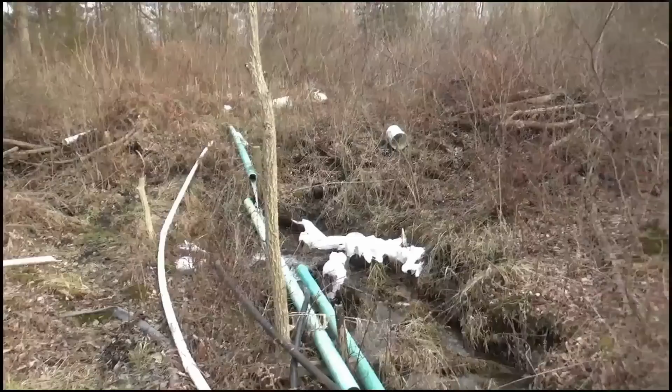Okay, real briefly, this video will cover many of the technical details in determining whether or not you will be able to build a ram pump given your situation. If you don't know what a ram pump is, we'll go into that. We'll go into how to take elevation measurements, how to take volume calculations, how to figure out what the best size ram pump for your situation is, how to correct for elevation.

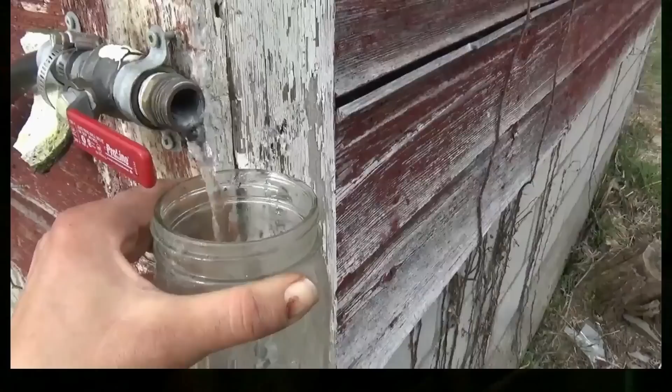We're going to go into a whole bunch of stuff here, and then we'll go over some of the finer nuances of ram pumps as it relates to practical application regarding plumbing, fittings, types of pipe, filtration, intake, standpipe setup, all that sort of stuff. So this video is basically a technical manual so that you can understand how to design and implement a ram pump on your farm or homestead.

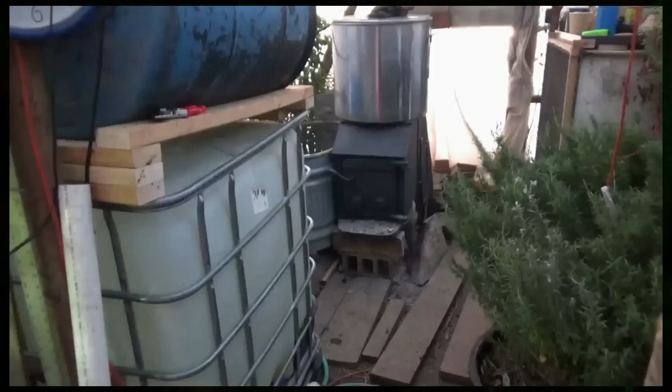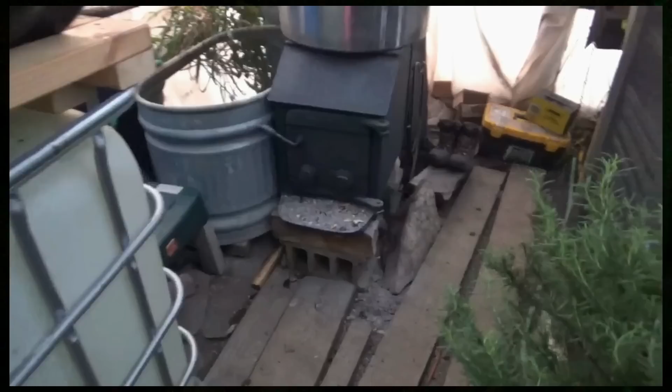I've spent a lot of time playing with ram pumps and learning about them, and I've done many different videos on them, and a couple of them really took off, so there seems to be some interest. So I thought I would do this video because I had a lot of questions along these lines, and I thought I would just make one long video and cover it. All said and done, I think this video is going to be about an hour and a half. I apologize for the length, but I really wanted to be clear and specific on technical details. So I hope you'll bear with me if you're interested in this sort of thing and you want to build a ram pump. I hope this video will help.

February 4th, 2020. So I've been promising to get back to this video for quite some time. This video is basically site selection and how you measure and take calculations on a site to determine whether or not you can put a ram pump on a site, and if you can, what size ram pump you can put on, and generally what its output will be, how high it can pump, what the volume will be, all those sort of parameters. So, what is a ram pump?

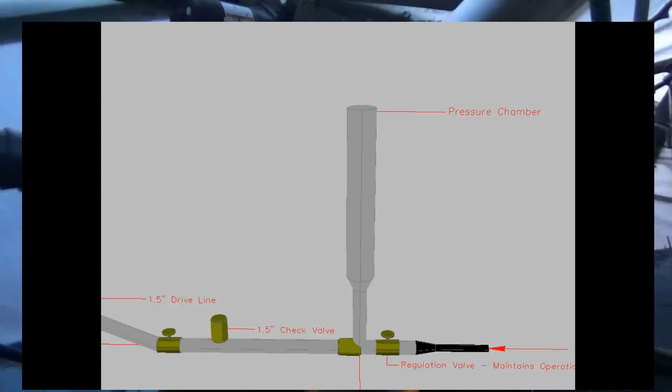A ram pump is a hydraulically operated pump. Basically, it uses a portion of the water that is falling from a water source to drive the pressure in the pump. Some of that pressure, some of that energy is used and transferred to build pressure in the pressure chamber. The pressure chamber side is the output side that delivers a small portion of the water that is being pumped through the ram pump to your destination. The rest of the water that's going through the pump is wasted. It's not actually wasted, its energy is being used to pump the small portion of water up.

So a ram pump will typically pump about 10 times the fall distance. So if you have water falling 10 feet and you have enough water to supply a ram pump, you can basically pump to 100 feet with a portion of that water. And usually that runs somewhere around 10 to 15% of the total volume throughput of the pump.

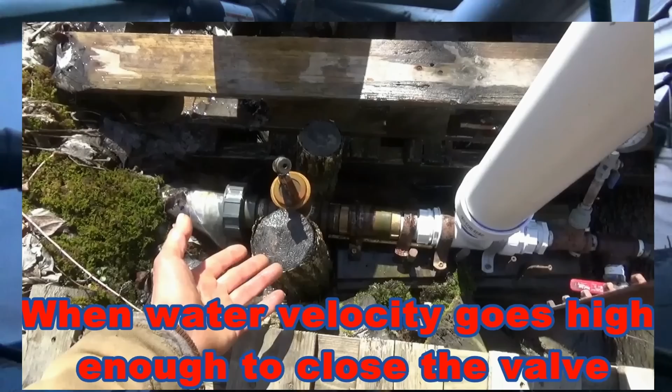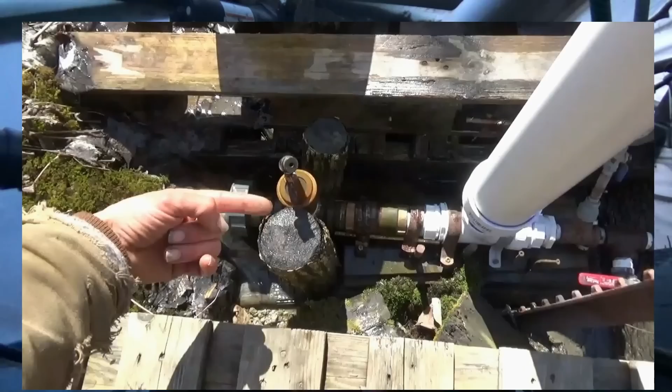So basically a ram pump is a hydraulically operated pump, and it uses an air pressure chamber to buffer the hydraulic shock that we're taking advantage of. Hydraulic systems are systems that don't have any gas in them, and so the fluid inside that system is virtually incompressible. Water can be compressed, but it's such a small amount that it's not noticeable. And so instead of letting that shock be a detriment to the system, we take advantage of that hydraulic concept and we use it to pump a small portion of the water going through the pump. So that's basically what a ram pump is and how it works.

Okay, so before we get too much deeper into calculating ram pump stuff, anytime you engineer or design something, you really want to understand the machine that you're trying to design and what's involved in it. You really need to understand the specifics of it before you can really determine whether it's something you can do.

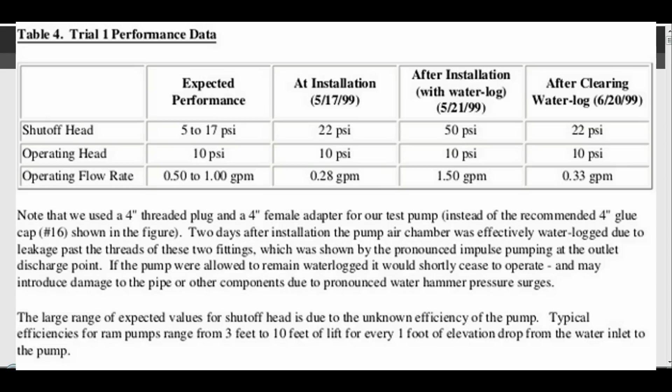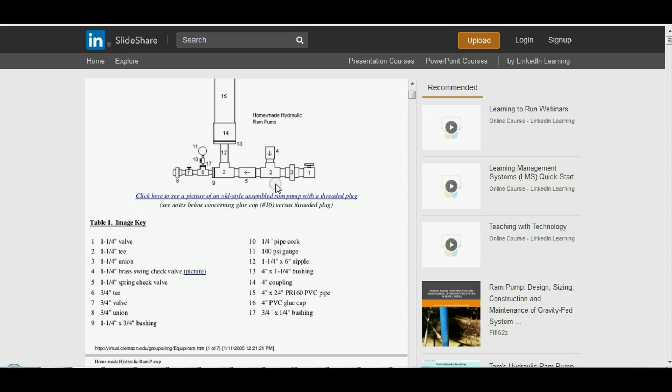The typical cost of fittings for a 1 1/4 inch pump currently is $120 US, regardless of whether galvanized or PVC fittings are used. Now this is an older manual, so the cost is going up a bit due to material costs going up and inflation. This is the basic diagram of how a ram pump works. I suppose we should go over that quickly. Well, we'll come back to that, I think. Let's see, they go into connections a little bit, and using appropriate and proper fittings and connections.

Let's see, important pieces. Pressure chamber. A bicycle or scooter tire inner tube is placed inside the pressure chamber, part 15, as an air bladder to prevent waterlogging or airlogging. Inflate the tube until it is spongy when squeezed, and then insert it in the chamber. It should not be inflated very tightly, but have some give to it. Basically, this is going to act as a shock absorber so that the pump doesn't tear itself apart.

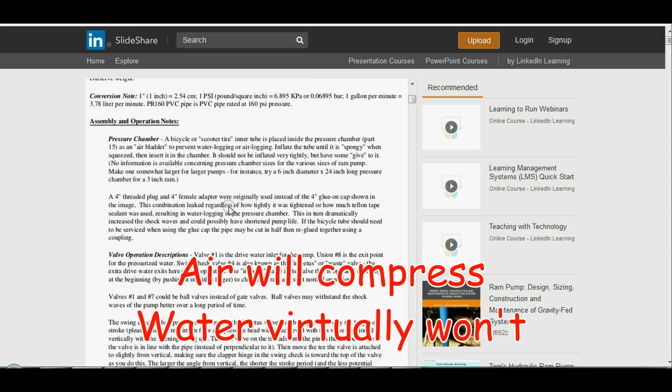No information is available concerning pressure chamber sizes for various sizes of ram pumps. Make one for somewhat larger pumps. For instance, try a 6-inch diameter by 24 pressure chamber for a 3-inch ram. I will say I have tried many different chamber sizes, and I found that the size of the chamber, once you get big enough to absorb shock, doesn't matter much, and it will not affect your pump delivery or anything. So don't go crazy on building a chamber.

You probably don't need more than 4-inch diameter and 36 to 48 inches tall, unless you're building a massive ram pump like in the 4-inch range or bigger, or maybe even 3-inch. You might get a little bit bigger, but anything below that, from 2 inches on down, you can go down to pretty small. If you're building a 1/2 inch or 3/4 inch or 1-inch ram, you probably don't need much more than maybe a foot tall by 3 inches in diameter.

I've tried all sorts of different stuff as shock absorbers. I have not found anything that lasts long term. I have not gone back and retried the bicycle inner tube. I think that is probably your best bet. But what I ended up doing was, occasionally I drain the pressure chamber out and let fresh air into it, and then fill it back up and run it. And I find that runs for a couple of weeks before it dies down.

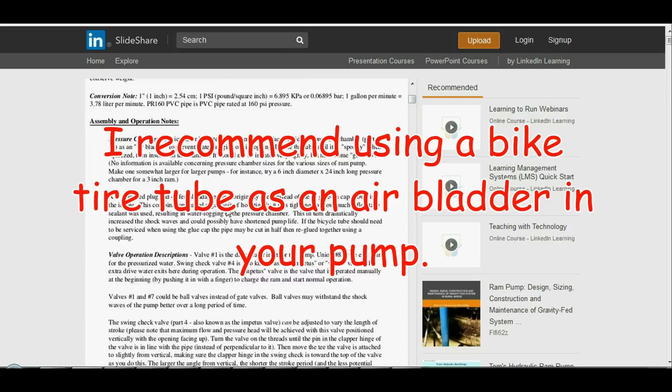Ultimately, I want to put a snifter valve in, but that can be a little bit tricky because you have to drill a hole that lets just enough air in without compromising the efficiency of your pump. And I've been a little hesitant to do that since the pump works so well. Let's see. They tried to use a 4-inch threaded plug for this pressure chamber so they could get it open and closed.

They found that this combination leaked regardless of how tightly it was tightened or how much Teflon tape they used in the seal. If you have a leak in the pressure chamber, it waterlogs quickly, and then your ram pump doesn't run as efficiently, and it will tear itself apart because now all that shock is being put on every piece of that pipe.

One thing with hydraulics, the pressure that you put into a hydraulic system is uniform across the system. So if you have a water shock or water hammer situation in the system, that shock is being distributed to the entire system at the same time. So they say this in turn increased the shock waves and could possibly have shortened pump life. And they say if the bicycle tube should need to be serviced when using the glued cap, the pipe may be cut in half, and then you can re-glue them with a coupling.

I don't like doing that. I did find a way around the threaded plug issue. I do recommend you use a threaded plug, except I would get some silicone sealant like you use for aquariums, and I'd put that on the threads of the plug, and I'd thread the plug in, and I'd let that sit 24 hours at room temperature to dry or cure.

And then I found that that kept it from leaking, and it made it so that you could open it up later on with a pair of channel locks or a big pipe wrench. You could get that cap back off, but that maintains your seal. So that was how I got around that issue.

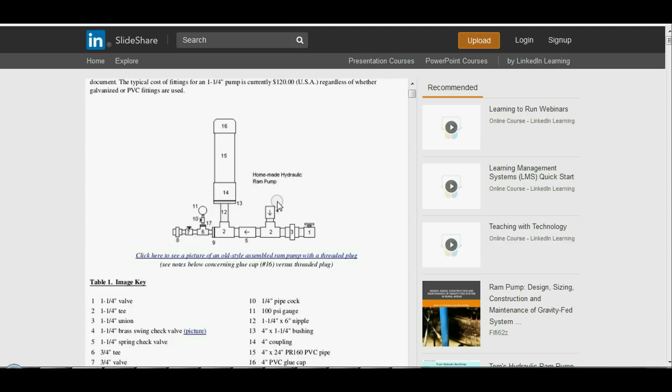Let's see, so valve number 1 is drive inlet for the water pump. Let's go back and look at this diagram quick here. So this is an on-off valve basically, and this here is a check valve, and this here is a check valve. This check valve is run reverse, so as water flows down the pipe, it pushes the check valve until it slams shut. When this check valve slams shut, that forces through the water shock,

that forces this check valve open and lets a portion of the water out and into the pressure chamber. That water fills into the pressure chamber. There's airspace in here, say from like here or so, and that water fills into the pressure chamber because the air allows it to. When the equilibrium between this pressure and this pressure is met, then this valve closes and it holds that pressure in there, and then you're letting that pressure out slowly over time, basically out through your delivery line.

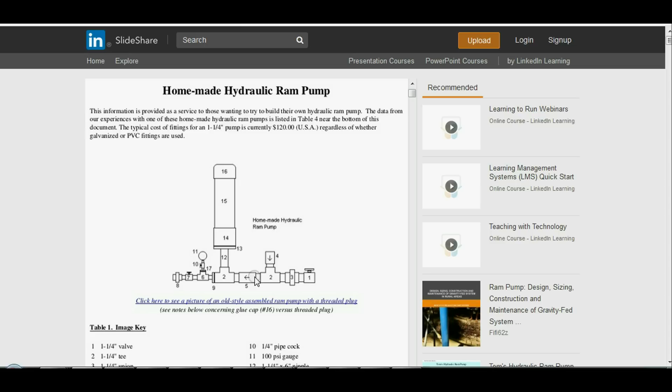And this cycle will keep repeating itself. This valve will fall back due to gravity once there's no pressure holding it, and when it does, it'll open up, water will start to flow again, and it'll come through, it'll slam this valve shut again, that'll push this open again, push another portion of water in, and the cycle continues. So that's how that works. That's basic understanding.

Let's see, they get into some pretty in-depth information in here. One thing we do have to cover is drive pipe. So these calculations, these numbers right here, are excellent for calculating drive pipe length. So let's just, oh boy, if I can find a calculator.

Okay, real briefly, I want to touch on the drive pipe of the ram pump. The drive pipe of the ram pump is the water inlet side going to the pump. That usually either comes from your water source directly or comes from your standpipe, depending on the logistics involved in your system and the terrain that you're working in. But basically, the drive pipe is the water flowing into the pump. That drive pipe should not have any air in it, so that you don't have any place for the water to compress except through the valves that are in the pump.

And that water in that drive pipe is effectively acting as a sledgehammer. And so just to help you visualize this concept a little more, if you have a 20-foot long pipe full of water that has a certain amount of weight and mass to it, and that's moving in inertia in each cycle of the pump. If you have a 40-foot pipe, that's the equivalent of double the amount of water in there, and it's basically double the sledgehammer that's driving that initial valve in the pump. And so you have more energy available in there. But there are some limitations to that. We'll get into that in another clip.

The drive pipe is best made from galvanized steel. More rigid pipe is better, but Schedule 40 PVC can be used with good results. The more rigid galvanized pipe will result in higher pumping efficiency and allow higher pumping heights. Rigidity of the drive pipe seems to be more important in this efficiency than the straightness of the drive pipe. I found that to be true also.

Drive pipe length and size ratios are apparently based on empirical data. Information from the University of Georgia publications, see the footnote, provides an equation from Calvert 1958 describing the output and stability of ram pump installations in relation to the ratio of the drive pipe length to the drive pipe diameter. The best range is a length to diameter ratio of between 150 and 1000.

Equations to use to determine those lengths are minimum and maximum. Minimum L equals 150 times inlet pipe size, and maximum L equals 1000 times inlet pipe size. So let's look at that. If your inlet pipe is 1.5 inches, say, and we use the 150 number, you have 225 inches. We'll divide that by 12 to get it into feet. So your minimum length would be about 18.75 feet.

And then we'll do it again, 1.5 inch times 1,000 is about 1,500 inches, over 12 is about 125 feet. And that would be your maximum for a 1.5 inch pipe, or 1.5 inch ram pump. As I mentioned before, mine is about 117 from the water source to the pump. I did not want that entire pump to be pulsing and flexing because it's made of PVC.

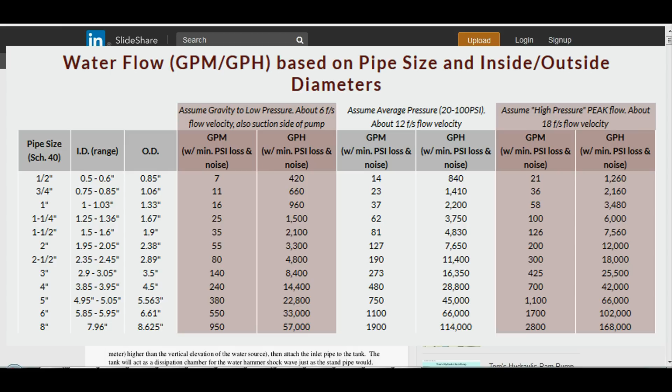You have to remember, we're working with gravity here, and the amount of volume you can deliver to that pump matters tremendously, because if that pump takes on even a little bit of air, it will disrupt the pump's operation, decrease its efficiency, and possibly even make it shut off on you. So you want to make sure your supply line is always 1 size larger than the drive pipe on the pump. So that's an important thing to note.

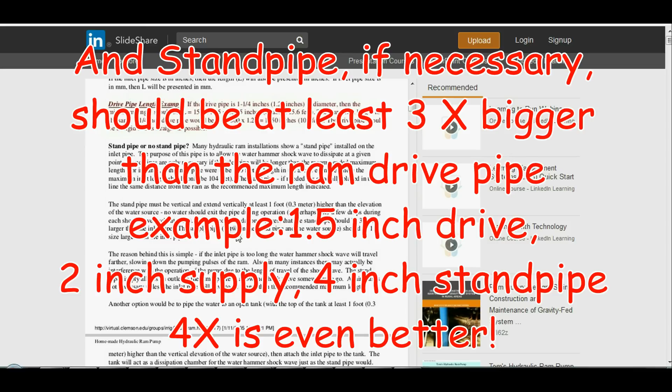So if you're making a 1.5-inch ram pump, you want a 2-inch supply line to your standpipe if you have to put a standpipe in. If you're making a 3-inch ram pump, you want a 4-inch supply line. If you're making a 1/2-inch ram pump, you want a 3/4-inch supply line at least. I'd say probably just go to 1 inch. Just do it. It's not that much more expensive. But that's an important thing.

You want to make sure you have plenty of water volume coming into the standpipe so the standpipe stays full of water. The standpipe not only dissipates the shock wave, but it also acts as a water buffer. It makes sure that you don't deplete the amount of water that you need to keep the pump running smoothly. All right, let's see. And I'll read the rest of this piece to you. The reason behind this is simple.

If the inlet pipe is too long, the water hammer shock wave will travel farther, slowing down the pump pulses of the ram. Also, in many instances, there may actually be interference in the operation of the pump due to the length of the travel of the shock wave. The standpipe simply allows an outlet to the atmosphere to allow the shock wave to go somewhere. Again, this is not necessary unless the pipe will have to be longer than the recommended maximum length.

So that interference thing they're talking about: if the pipe is too long, as the ram pump starts to cycle its next cycle, there's still a shock wave coming back through, and it will actually interfere with the cycle, and basically the ram pump will cancel itself. So you want to avoid that at all costs, because obviously you're not going to move much water if the ram pump is canceling its own action.

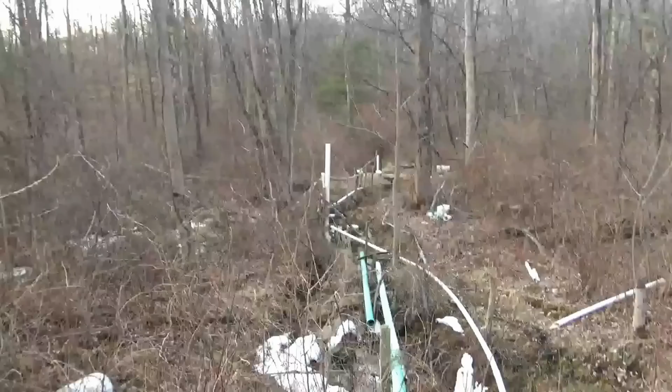This pipe coming across from the spring is a 2-inch pipe. It runs through the dam and then down to the standpipe. The total distance of this pipe, this 2-inch supply line to this standpipe, is 117 feet. And so I'll pull up calculations here, or maybe I'll throw them up here on the screen as an overlay.

If you look at the charts and do the calculations for a 1.5-inch ram pump, which is what I calculated there was enough water volume to support, for a 1.5-inch ram pump with a 2-inch supply line, you don't want to exceed 100 feet to the ram pump, or 105 feet, something like that, or you'll end up with too much back shock going all the way up this line, and so you have to put a standpipe in to relieve that shock.

So this pipe runs at 117 feet and hits the standpipe, and then there's another 35 feet that it goes from the standpipe to the ram pump. We'll get into those calculations too when we get back inside, and I can pull some nice numbers and charts and information up for you.

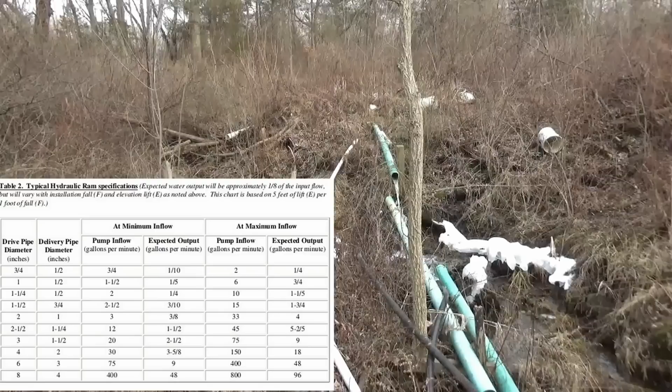So the first thing I did was come out here and measure water volume coming out. That was before any of this piping was here, so I had to use a fairly archaic method of measuring. So I measured the water volume. At the time, it was springtime, it was getting about 10 to 15 gallons a minute. I worked with springs before, so I knew the spring could be developed out a little bit more.

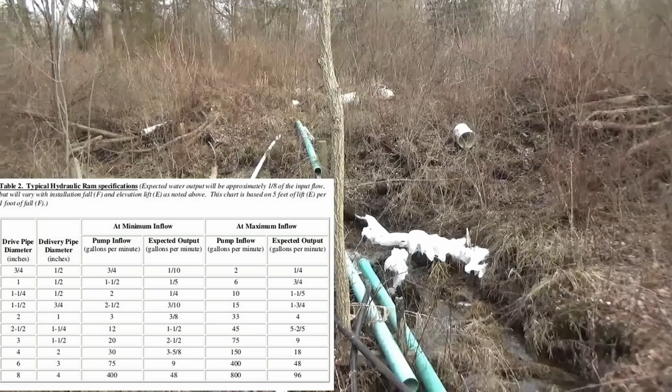But I figured 10 gallons a minute would supply a 1.5-inch ram pump right on the edge, and I knew I could scale the size of the pump down, and I wanted to move as much water as I possibly could. So I started with 1.5 inch, knowing I could fall back to a 1-inch ram pump if I needed to.

So in order to get water volume calculations, the easy way to do that is to take a 5-gallon bucket and hold it under your outlet and figure out how many seconds it takes to fill it, and then calculate how many gallons a minute you're getting from that. Obviously, that's the easy way.

Most cases, if you're developing a ram pump, you don't have a nice easy pipe already there to capture the water from. You may not have a pipe handy that you can divert all the water in the stream, or from the pond or your source, into a bucket. And if you don't have that, the next easy way to do that is to pick a spot in a stream like this, where you have a given depth and width, and then calculate the speed at which the water is traveling, and calculate using depth and width what the volume is, and then use the speed to calculate how fast that volume moves through.

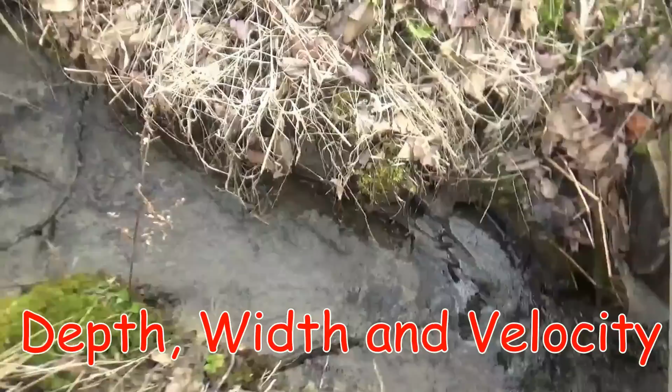So we'll go over that in a minute, but basically in this case, I should have brought a measuring tape, but it's about 1 inch deep, and it's maybe about 10 inches wide or so where the water is actually flowing. And the real simple way to do this is to take a measuring tape, mark a length, drop something that floats on it, see how long it takes to travel that length, then you have how much volume is moving at what speed. We'll get into those calculations a little bit deeper later in this video, but I just wanted to illustrate the concept for you.

Alright, then the other thing you need to know for a ram pump is what your total fall is. Now there's a couple ways to calculate that as well, but we'll go over the 2 easy ways. One, you can take something like a garden hose, get it into your water source up above, start a siphon on it. If you don't know how to start a siphon, we could go over that, or you can ask a question in the comments below.

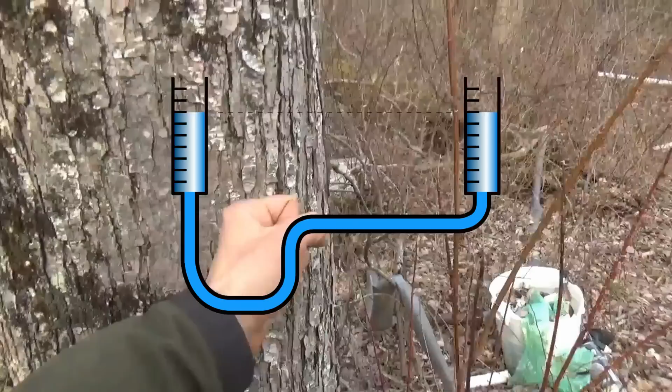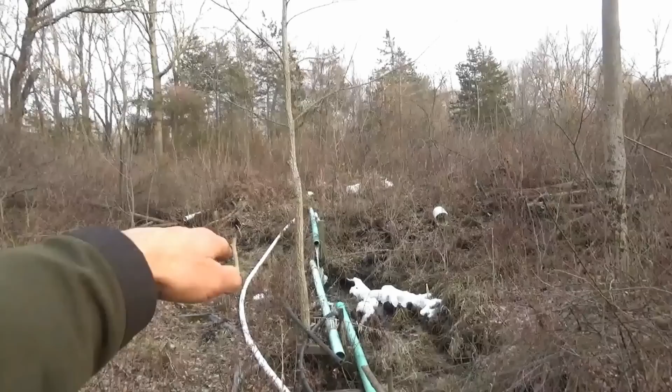You start a siphon on it, you bring it down, and then wherever you bring that hose end up, this is called a water level, you'll reach a point where you hit equilibrium, where water stops flowing out the end of the hose, and where you drop the hose back down a little bit, it starts to flow. When you come up a little bit, it stops. That's your level point. And then you can use a measuring tape to take your tape drop and figure out what your fall is. In this case, we have about 6.5 feet of fall from the top of the pond to where the ram pump is.

I used a combination of a water level line like I was talking about, and the other thing I used was a string level on a string, and I set a stake up at the water line, right at the water's edge, and I ran a string from that water's edge out level, and I ended up having to come to a post here and run another string, or extend that string level again out to where I wanted to set the pump. And then when I got out over the pump with a level string running level from the water level, you can just drop a measuring tape down and you figure out exactly what your drop is.

So those are some key pieces that you're going to need to have to design and determine whether your site will support a ram pump and installing a ram pump. Once you have those, you got some calculations to do. And I think I've covered everything out in the field here that I want to cover. We'll get into calculations later in this video, but I just wanted to make sure that in daylight you could see what this site is, so you can better understand how to go about making these calculations.

So what we'll do now is we'll go back inside and we'll make some calculations based on that. And we'll talk about all the little eccentricities and logistics and details that go with designing a ram pump and making it function like you want it to. Alright, so that's it for now. We'll go inside and we'll talk turkey.

Okay, so one of the core concepts you should understand right off the bat for building a ram pump is vertical foot and how it relates to pressure and head. So head is the distance of vertical drop, and it can be expressed in positive or negative values based on what you're doing. But in general, for every 1 foot of vertical rise, you get 0.433 pounds per square inch of pressure at the bottom of that water column.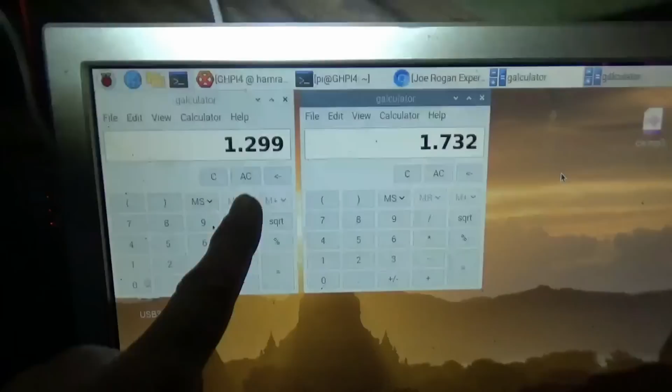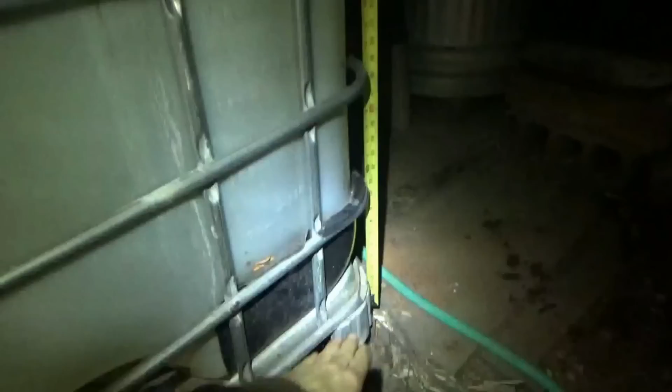So as you go up 1 foot, 2 foot, now you're at 0.86. 3 foot, you're at 1.299, and at 4 foot you're at 1.732 pounds per square inch at the bottom of that water column. This will be an important part of building your ram pump because you're going to need two basic calculations. Number one, the vertical foot of head that you need, or that you have, from your water source to your ram pump, or where your ram pump will be placed.

And the other one you need is the vertical foot of head that you want to pump to, because if that ratio isn't high enough, you won't be able to deliver a specified amount of water to the location that you want to, and the height that you're pumping to will affect how much volume of water you will actually deliver. So using the line level and the water level techniques, you can calculate, hopefully in your situation, from your water source to your ram pump.

Okay, and so to calculate the elevation from your ram pump to your delivery point, you can use several different methods. I would not count on Google Earth. If you have a GPS unit, you could probably get reasonable accuracy, but know that that could be off as much as 30 feet on vertical elevation also, even with good satellite coverage. So the best way to do it is to run a line level and drop measurements, and you can do a series of strings level and just keep adding the drop measurement across the strings.

And another way to do this is you can use an orange marker and a scope with a level, and you get the level set and you shoot the far point. This is kind of like surveying or using a transit. If you have access to a transit, I highly recommend that. That is really a better way to do it. Or if you have access to an engineer who can do elevation datum, that's a possibility as well. Although typically that equipment is quite expensive to have someone come out and actually take elevation shots for. So I hope this helps you understand the basics of water pressure as it relates to elevation change, or vertical foot of head.

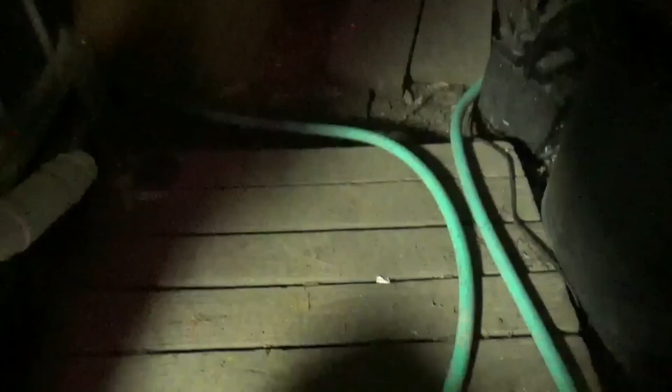One other means of calculating the vertical height going either to your ram pump or from your ram pump to your delivery point would be running any sort of pipe or hose down from the highest point and filling that pipe or hose with water and putting a pressure gauge at the bottom, and you could measure the pressure and calculate very accurately what the vertical distance of fall is.

So that line would have to be sealed completely, and you'd have to fill it with water from some source by whatever means necessary. But that would be an accurate way to get exact vertical elevation over long distances and multiple swales, or where there's trees in the way obstructing your view. That would be another way to do it.

However, if you're going to do that, you might consider doing it in the delivery line size that you want to select for your ram pump, and then after you use that for your pressure calculations and your elevation calculations, if you decide you can and want to go ahead and build a ram pump, you'll already have the delivery line for the system. These are just some other thoughts on how you can arrive at accurate elevation datum for designing and building your ram pump.

Okay, let's briefly go back to the measuring the trench method for volume calculation. Real quick, we'll look at this box. Basically, that's what we're simulating in the previously mentioned trench method. You want a depth, you want a width, you want to make it relatively uniform, and you can even take a few boards and set in the stream bed and channel the water through them so you get a nice uniform height. The more accurate you can represent that, and the more accurately you can measure the speed, the more accurate your actual water volume calculations will be.

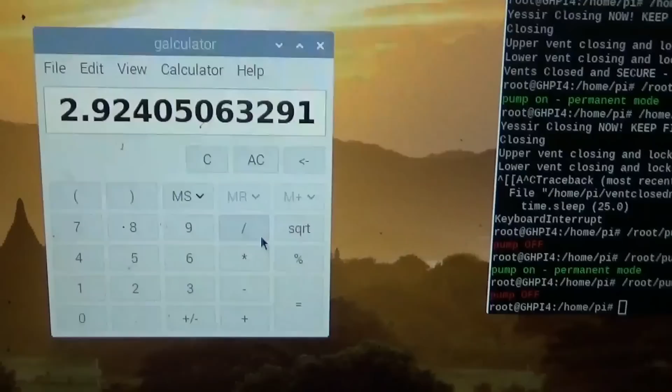There's 231 cubic inches in a gallon. We'll call it 79 for easy calculations. And I did that backwards, so we'll say 79 over 231 cubic inches in a gallon. So that box is 0.34199 gallons, roughly. So about 0.35 gallons for every time that the water cycles through that box. So let's just consider that a second. So if the box is full of water, I'll demonstrate.

And said water is flowing at a given speed, now we can calculate how many times per minute, effectively, this box is replaced in water volume. So in our calculation, we're looking at a water depth of 2.5 inches, a channel width of 3.5 inches, and we're taking a 9-inch segment of that and measuring the speed the water travels through it. So if it takes 60 seconds for that water to travel that length, then you're looking at 0.35 gallons a minute.

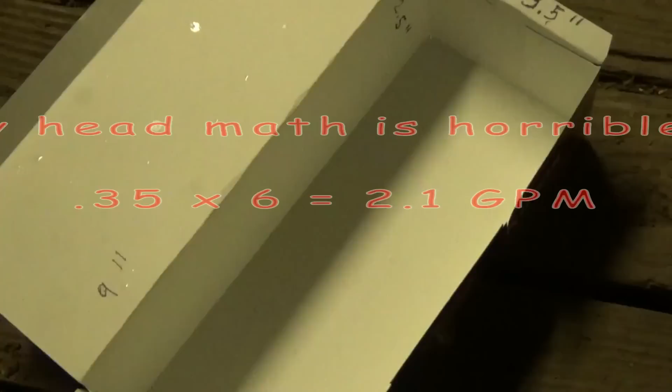And then of course you can calculate from there and figure out speed. Say it takes 10 seconds to traverse that, then you're doing 6 times 0.35, because there's 6 10-second segments in a minute. And let's see, 6 times 3, 18. So you're looking around 2 gallons a minute. So this is just an example of how to do this. But remember to picture this full, like this shot here. So just remember, every time this fills up, that's 0.35 gallons. And then you can make your calculations easily based on the trench, the water depth, and the speed at which it's traveling.

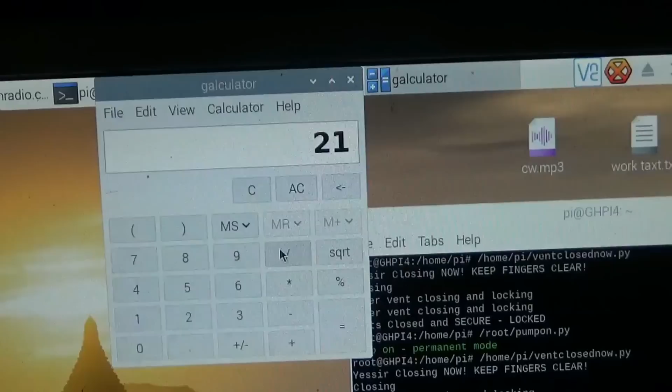Okay, so let's just hash this out quick. If it is, we'll say 0.35 gallons, and if it takes 1 second for your float to traverse down that channel, and that's 0.35 gallons, that means in a minute you've moved 21 gallons. So then from there you can basically say quite easily how much actual volume you're moving. All you got to do is take a measurement in seconds and crunch those numbers like that. I'll throw a formula up quick, and then you have your volume flow.

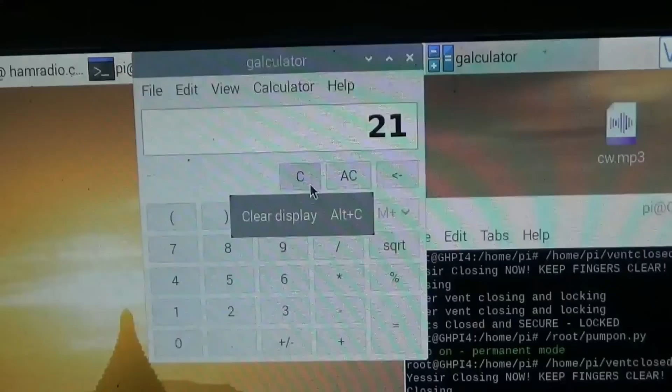And of course, depending on your water source, you should adjust this for the time of year. If you have dry seasons, your water flow will likely reduce. So try to design a ram pump system that will work at the minimum water flow for the season, so you have guaranteed water delivery throughout the season.

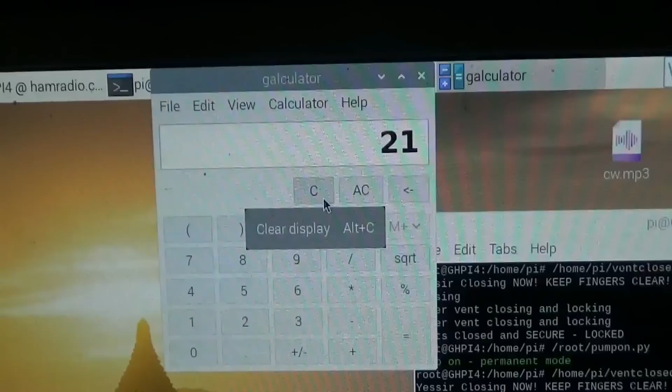I have another video on ram pump scalability. You can actually take a larger ram pump design and scale it down with a smaller impetus valve. So that is also an option, and I discovered that after building the 1.5 inch during dry seasons, and I was able to scale down to even as small as a 1 inch valve. Delivers a lot less water, but sometimes some water is better than none.

Okie doke. Well, now we're going to get into the meat of it. First, we'll start with just going through the operation description as they describe it, because they do a very good job of describing it. So let's start with that. Operation. The pump will require some back pressure to begin working. A back pressure of 10 psi or more should be sufficient.

If this is not provided by elevation-induced back pressure from pumping the water uphill to the delivery point, water trough, barrel, etc., use the 3/4 valve, part 7, to throttle the flow somewhat to provide this back pressure. So basically you're closing the output valve to create back pressure so the pump will run. It won't run under 0 back pressure. You need to have some resistance. Otherwise there's not enough pressure to keep it functional.

As an alternative to throttling valve part 7, you may consider running the outlet pipe into the air in a loop and then back down to the trough to provide necessary back pressure. A total of 23 feet of vertical elevation above the pump outlet should be sufficient. Notice how that corresponds if you multiply 23 by 0.433 pounds per square inch. That gives you that 10 psi they're talking about. So we covered that before, just wanted to reference it so you understand where the 23 feet is coming from.

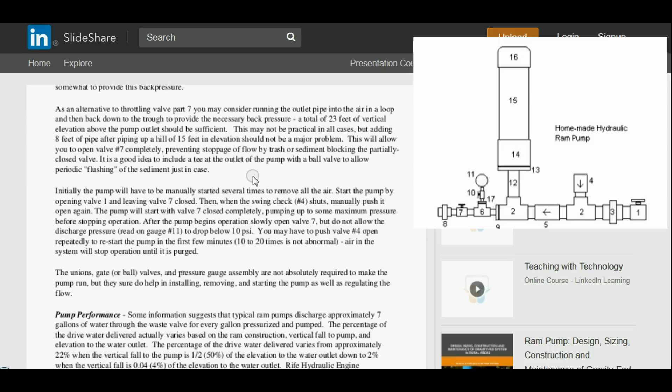And you'll notice if you go back and look at the video on my pump, you'll see I have a T in there and you can flush right out directly, and I highly recommend that. That's super effective for flushing, and also if you end up wanting to pump water somewhere else, you can just plug a garden hose in or whatever your fitting is and move water elsewhere. You can use it for washing stuff up when you're working on the pump or whatever. Very handy to have a secondary outlet.

Anyway, initially the pump will have to be manually started several times to remove all the air. Start the pump by opening the valve 1 and leaving valve 7 closed. We'll just go back to this diagram quick so you know what I'm talking about here. Valve 1, this is the output valve. I'm sorry, that's the inlet valve, and valve 7 is the outlet valve. So valve 1, valve 7, pressure chamber, pressure gauge, delivery line, drive pipe coming in on this side.

Let's see, start the pump by opening the valve 1 and leaving valve 7 closed. Then, when the swing check number 4 shuts, manually push it open again. You'll have to do this several times till it builds up enough pressure to operate on its own. The pump will start with valve 7 closed completely, pumping up to some maximum pressure before stopping operation.

After the pump begins operation, slowly open valve 7, but do not allow the discharge pressure, read the pressure on the gauge, to drop below 10 psi. If you don't have a gauge, just very gently crack that valve open.

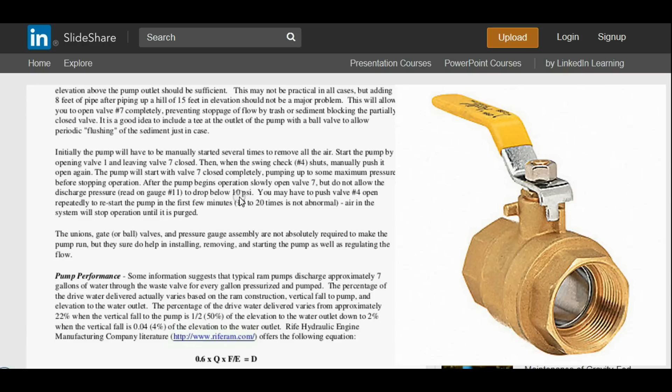I use the ball gate valves because they're a nice simple valve, but you might be better off as far as regulation goes using the older screw type valve where it's multiple turns. So you might consider that in your design.

You may have to push valve number 4 open repeatedly to restart the pump the first few minutes. 10 to 20 times is not abnormal. Depending on your situation, I would say you could go up to 50 times. If you've seen my recent videos, the pump starts up, I think it's like 5 or 6. But my pump is really tuned in now. I've really gotten it dialed in.

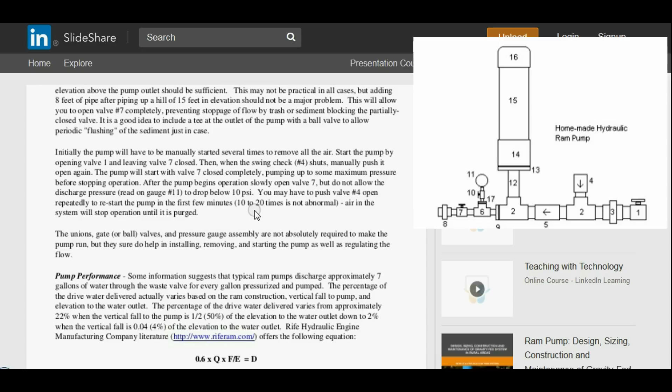Anyway, air in the system will stop operation until it is purged. They're specifically talking about air in the drive pipe. You have to eliminate all air in the drive pipe. So before you even start this process, you want to make sure that your standpipe or your water source and your drive pipe are completely full and all the bubbles have bubbled back out through the top. It may take 20 or 30 seconds for all those bubbles to work their way out before you start up.

The unions, gate or ball valves, and pressure gauge assembly are not absolutely required to make the pump run, but they sure do help in installing, removing, and starting the pump, as well as regulating the flow. And another thing the pressure gauge is very useful for is if you end up with a leak in your delivery line later on, especially if you're pumping to pretty high elevations, like mine, which pumps 72 vertical feet and about 900 feet distant.

You can use that pressure gauge to figure out roughly where your leak is in the line by looking at the pressure gauge and doing the elevation calculation, and you know the approximate area to look on the line.

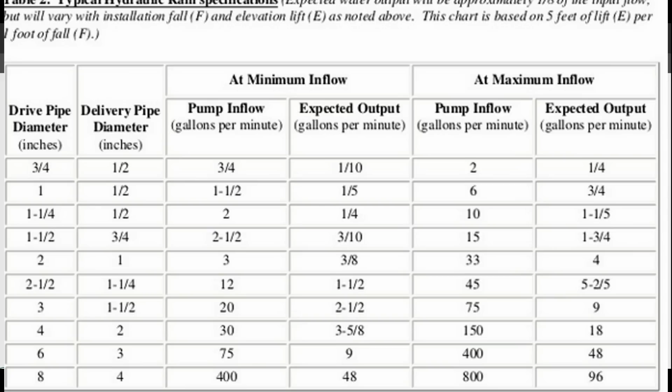Now, I mentioned previously that I used Google Earth and GPS and actual measurements in the field. I initially took GPS data for my delivery elevation from Google Earth. I knew it wasn't super accurate, but I didn't think it would be quite as far off as it turned out to be. According to Google Earth, elevation from my ram pump to the delivery point would be about 42 feet. And in real time, after I started pumping, I found out it's 72 feet.

So I was expecting somewhere around 1.5 gallons a minute based on this chart here. If you look at the drive pipe at 1.5 inches, 3/4 inch output for delivery pipe, I expected a pump inflow of around 12 to 15 gallons a minute, and I figured around 1.5 gallons a minute delivery, but that was based on a 42-foot elevation, and since it turned out to be a 72-foot elevation, I get about 0.85 gallons a minute when efficiency is really right on the money and flow input is good.

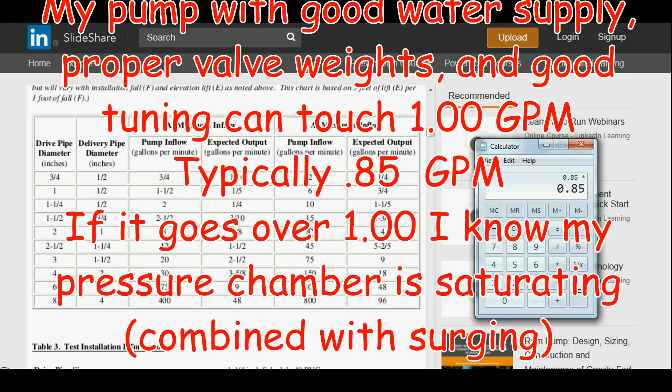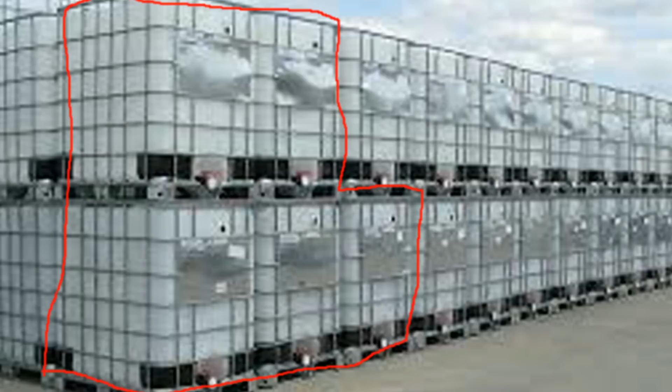Still, at 0.85 gallons a minute, and if you can run every day for 1,440 minutes a day, I'm still taking home 1,224 gallons a day, which is way more than I need for my homestead and farm here. So that is a good chart to go by. Let's just look at table 3. They're talking about 1.25 inches, schedule 40 PVC pipe.

Oh, I should mention that as well. Don't use cheap PVC for your drive pipe or for your pump parts. Use at least schedule 40. Even better if you can afford schedule 80, although that is significantly more expensive. Again, we want super rigid pipe. We want pipe that doesn't flex, because the more the pipe flexes under that pressure, the less of that energy is transferred through the secondary valve and used to pump water. You end up losing that energy in flex of the pipe.

It's outletting at 3/4 inch, schedule 40 PVC. I will say this, if you're trying to save some money and you want a line that you can run all over the place and not have to do a bunch of PVC glued fittings, I would use the black coil pipe, or poly pipe it's called, or well pipe. You'll see it in my videos. It's the black stuff, and it's super flexible. You can get fittings for it cheap. You can cut it and put new fittings in it real easy, and you don't have to use PVC glue. I would recommend you get the barbed type fittings and use appropriate stainless steel clamps if you're working under any serious pressure.

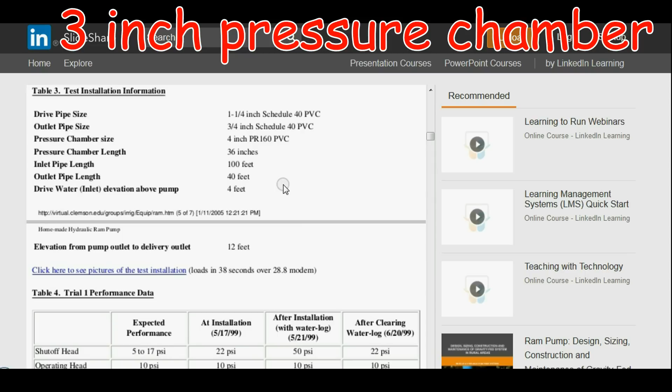They're talking about different pressure chamber sizes. They're saying 36 inches here for the 1.25 inch pump. I would say that's a good size to go with anything 1.25 inch, 1.5 inch. That probably even would work for the 2-inch pump. You might want to go to a 48-inch length chamber for that. And they're using 4-inch here, and I have 4-inch on mine as well. Inlet pipe length 100 feet, outlet 40, drive water elevation 4 foot. So they're driving with 4 foot there. And these are some real world tests that they did.

I did discuss this briefly earlier in the video about the threaded plug, but this will give you a good understanding of what happens if your bladder bursts in your pump, or if, like me, you're not running a bladder and you're just using the air pressure in the chamber. Over time, that air will dissolve into the water and you'll lose that air ballast. So it's good to shut the pump supply water off occasionally and open that secondary T valve. This is another reason that's really handy. Drain that out and let air flow back up into the pressure chamber. Then when you close that back up, you have trapped air again.

If you don't have air in there, this pump will tear itself apart because all that water shock is not being cushioned by anything. That water shock ends up transmitting throughout the entire system, and it will tear fittings apart. You'd be amazed how much actual energy is there. So let's just look at this quick.

We'll read the note first. Note that we used a 4-inch threaded plug and a 4-inch female adapter for our test pump instead of the recommended 4-inch glue cap shown in the figure. 2 days after installation, the pump air chamber was effectively waterlogged due to leakage past the threads of these two fittings, which was shown by the pronounced impulse pumping at the outlet discharge point.

If the pump were allowed to remain waterlogged, it would shortly cease to operate and may introduce damage to the pipe or other components due to pronounced water hammer pressure surges. The large range of expected values for shutoff head is due to the unknown efficiency of the pump. Typical efficiencies for ram pumps range from 3 to 10 feet of lift for every 1 foot of elevation drop from the water inlet to the pump.

And so I said generally 1 to 10, but you can see here that depending on what your water delivery needs are and your situation, you can actually move water a lot further than you might expect. Anyway, if you look at this at installation, their shutoff head was 5 to 17 psi, 22 psi here. After installation of the water log, it was 50. After clearing, it went back to 22. Operating head at 10 psi, 10 psi, 10 psi.

Flow rate 0.5 to 1 gallons a minute. They had 0.28 gallons a minute in installation. After installation, when it was waterlogged, they were getting 1.5 gallons a minute, but surging. And then after they cleared the waterlog, it went back to 0.33 gallons a minute. So that's one thing you'll notice if your bladder starts to go, or if your air space in your pressure chamber starts to fail. You'll see on the delivery side each pump pulse cycle come out in the form of a surge of water, and it'll start surging.

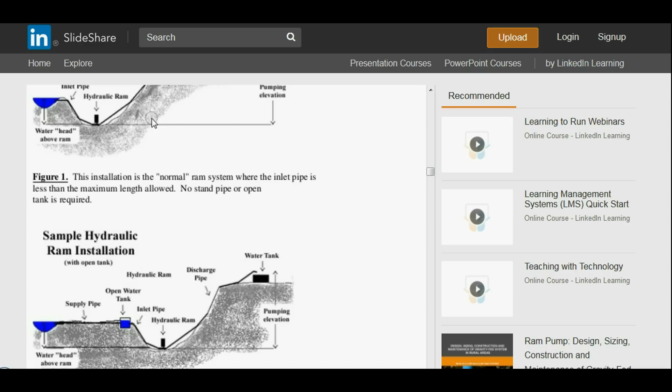This is a good diagram, general diagram of how it works. And you can see we're taking this little bit of fall here through the ram pump, and we're pumping to this very high height to the water tank. And they illustrate head here as well. Oh yeah, and they're showing one without a standpipe here, and then here you're seeing one with a standpipe, or a water tank they're calling it, but it's basically a standpipe.

One point I want to make about that, I said you wanted to make sure that your standpipe was up above your water source level. I mean the top of your standpipe. The bottom of your standpipe should definitely be well below your water level. What you're looking to do is set the standpipe about midway in and out of the level of your water source so that you have a constant volume supply. I hope I've made that clear.

This installation is one option used where the inlet pipe is longer than the maximum length allowed. The open water tank is required to allow dissipation of the water hammer shock wave. I think we discussed that previously, but I just want to make sure you get all the details here. Here's another sample installation. This is another option used where the inlet pipe is longer than the maximum length allowed. Remember, we did our calculations early on for different pump sizes. The standpipe, open to atmosphere at the top, is required to allow dissipation of the water hammer.

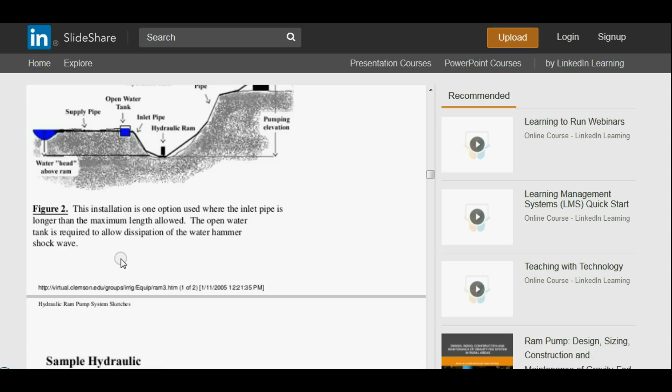You can see they're using an actual pipe in this example, and in this example they're using a tank. It really doesn't matter what you're using for hardware. What matters is that your water levels and your volume supplies are good. And I want to remind you once again that whatever size drive line you're using for your ram pump, you need to be one pipe size bigger than that for your supply line. Remember, we're working with gravity feed here.

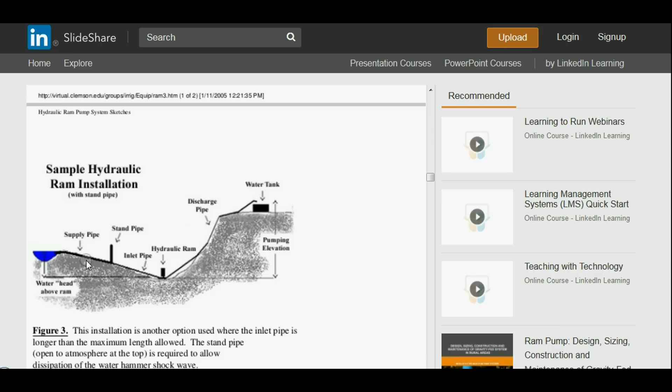So if your ram pump drive pipe is 1 inch, you want inch and a half pipe feeding your standpipe. If you're a 1.5 inch ram pump drive pipe, then you want 2 inch feeding your standpipe. At least; you can go bigger than that if you want, and so on and so forth. Let's see, I think that's about everything. They're just kind of illustrating some different pieces here.

Anyway, again, I'll show the link to this down in the bottom, and you can go check it out yourself. That formula for calculation I will put up as well.

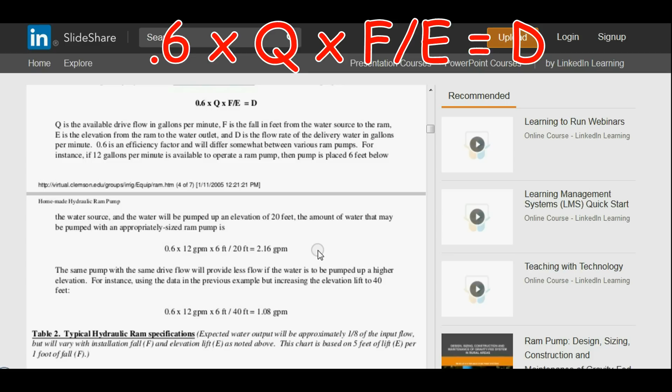This is very important for figuring out whether you'll get enough water out of your situation or whether it's worth building the ram pump. But you do need to take those measurements and calculations as I previously discussed, and like I said, the more accurate you can do that, the better off you're going to be in determining what your actual real-time volume production can or will be.

So here we are back out in the field at the spring head. Few more details to go over here in the field from a practical perspective. Just wanted to finish up on these details. So one, you want an intake suction strainer for your source water so you don't get debris in your pump. Debris can damage your pump.

It can also get into that secondary spring check valve, and it will actually lock the valve open if you get like a stick wedged in there. I've had that happen, and then your pump stops working and you don't know what's going on until you take it all back apart. So before you run any water through your piping, make sure you have a good filter on. This filter actually is clearly due for replacement again. I put this in just a couple of years ago.

This was an old air scrubber type filter, and I just took all the carbon filtration stuff out of it and used the caging. That worked pretty well. You want a relatively large size filter so you don't have one little spot sucking all kinds of gunk on the filter and clogging it quickly. So I would say look for something that's of large size, and screen mesh at least as small as that as your final mesh. You don't want to let anything bigger than that in.

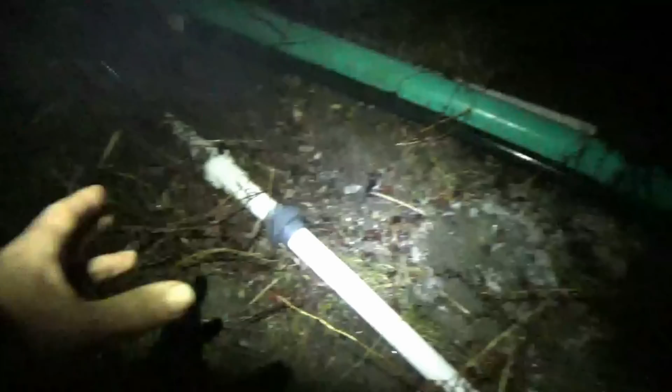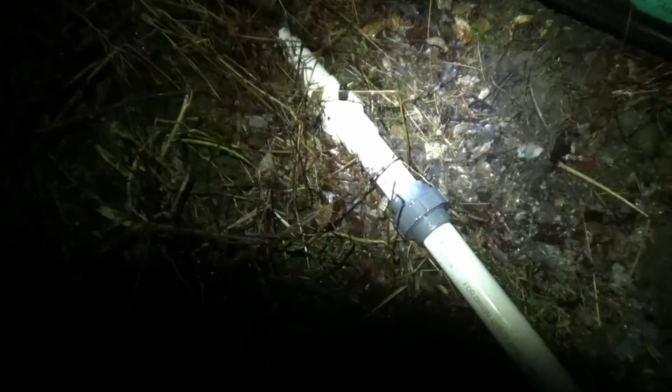So here we are back down at the ram pump site. Just want to point out a couple of things. For my setup, I wanted to pull fresh spring water to the ram pump and not just pond water. So you can see I've isolated the spring up there, and I'm pulling the spring water straight through the pond without touching the pond water. It gives a nice clean spring water feed, and we've actually had it tested and it's drinkable, so that's very nice, and it's excellent spring water.

Anyway, all that aside, two things here. We have a valve here, which I broke the handle part of the valve, so I just use a pair of channel locks to turn this valve. But this valve makes it so we can shut water off to the standpipe and work on this system, everything below the pond dam here.

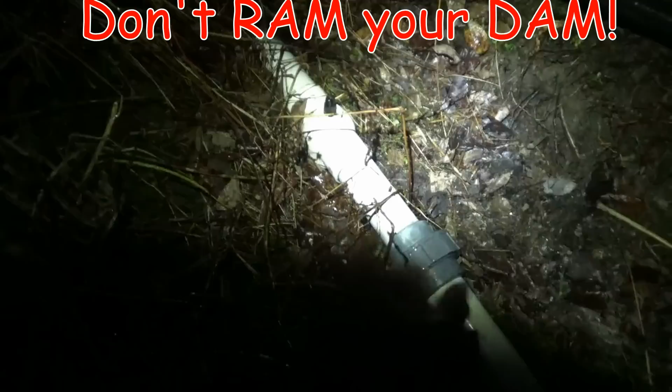One of the reasons that I put a standpipe in here is not only because of pipe length, but also because of the shock wave that's generated. If you dissipate that at the standpipe, then you don't have as much shock wave coming back up your supply pipe, and anytime you're running through a dam, you don't want to be putting shock on it, because you'll create a leak around the pipe, and then it will erode the dam, and then you won't have a dam. So just an important point to note: if you're going to be piping through a dam, make sure you put a standpipe in to dissipate that shock before you go back through the dam with your piping network.

Alright, another thing that we use here, these are super useful. They're expensive, and I recommend you get the Schedule 80. These are really nice. These are called unions, and they basically just thread together. You can get threaded and you can get slip fit. I recommend you get the threaded fit and get the threaded end coupling for the pipe and glue that on.

And then if you have a problem later on and you have to replace pipe, you can unthread these expensive fittings from your broken pipe if it breaks right up to it on you, and you can save the fitting. Otherwise, if you use the glue fittings, if the pipe cracks up to the fitting, you lose that. And those are about 20 or 25 bucks a pop, depending on the size you're working in.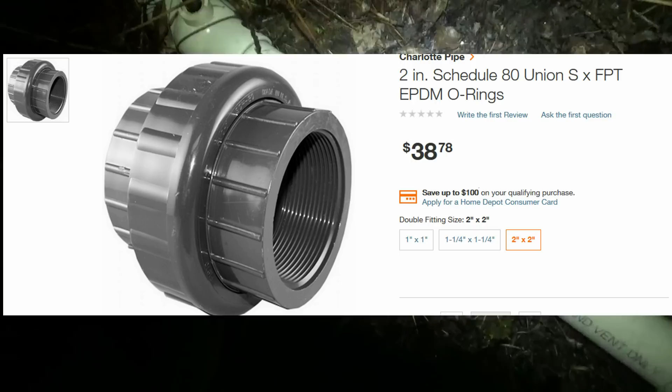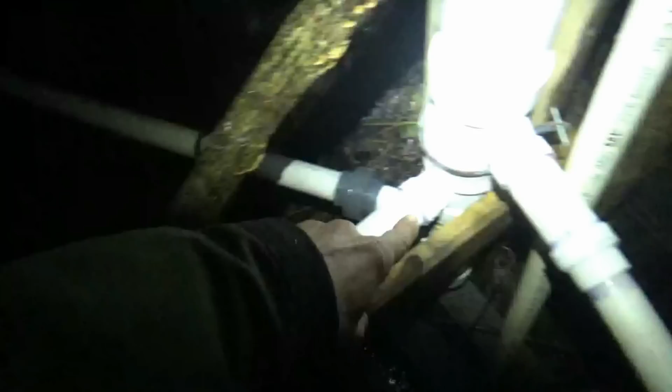At least 1.5 inches, 2 inch in that range. So that's something to consider. Let's go down and look at some other pieces, parts. So the dam is right about here. We've just come down our supply line, which is 2-inch pipe coming into our standpipe. This is a great place for me to show you a union.

Sorry I had to do this at night. Wanted to finish this video up.

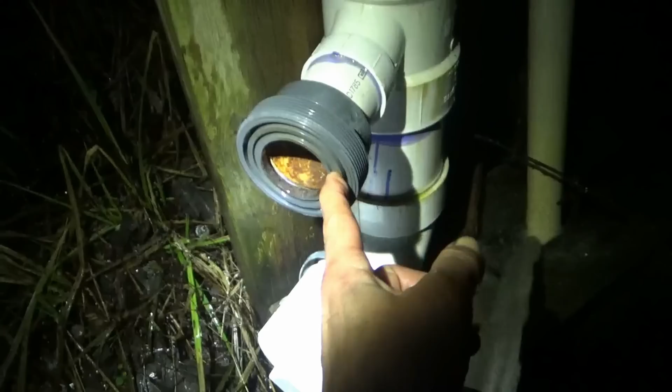So basically there's just two plastic ends. The other side of that, see if I can do this without going in deep in the mud. Yeah. The other side of this is supposed to have a rubber gasket. I gotta pick up another one. But under low pressure like this, it's not a big issue.

Anyway, these two pieces fit together. And then you can see this is threaded. And this collar is threaded on the inside. And it just threads together. And then that way you have an easy way to take your pipe apart for working on it. Or I don't know if you saw in the beginning when I first started flushing here, all the mud that came out. It's a good way to flush all the mud out.

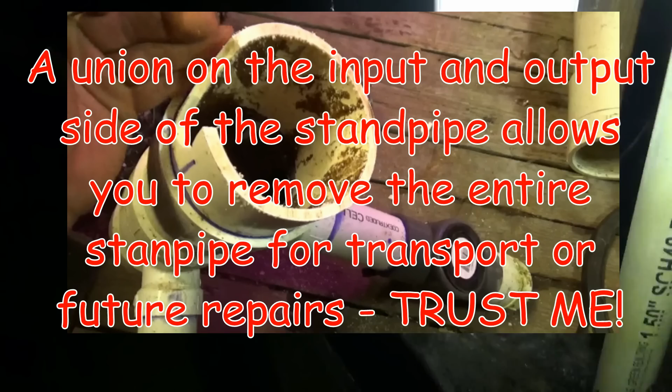We let the pump shut off at the moment, so we'll kind of sequence our way up through this. Alright, on to the next part. One sec. We'll just work our way through the rest of the standpipe here quick. So we've got a low input coming in. You'll notice I use 4-inch PVC pipe T with a 2-inch output on the T, so I can pipe my 2-inch into the 4-inch standpipe. The bottom is a 90-degree 4-inch, and it's got a 4-inch threaded end cap on it.

So basically the standpipe also acts as a sediment and small rock trap in case something does get through the screen. It falls out in here or floats out to the top instead of going into the pump. So when you stop the pump and dump the flush open, you can flush it out.

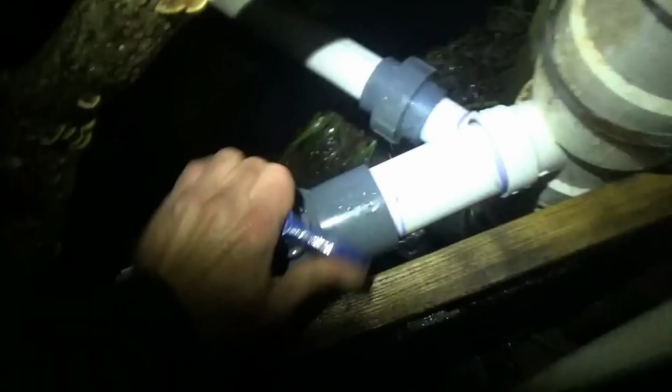The other thing that's really handy to have is another output on your standpipe. Pardon my footing. And I have a 2-inch here. This is a nice way to be able to just shut water off to the pump without having to shut that master valve off. And also another way to flush through the pipe if you just want to open it up to flush. Let's see, other factors. We are about 3 feet below actual water line, so water comes up to about here. So you can see that in scale.

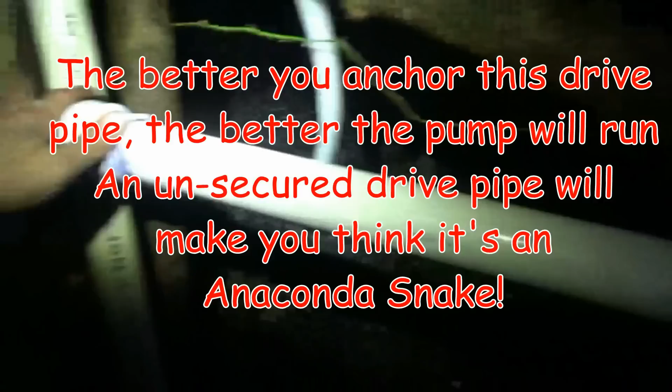Anyway, I would say coming out of your standpipe, you're going to want to set your drive pipe output to your ram pump lower than you think it is. So I would say go significantly below water level, but keep in mind that you do want to keep a relatively steady slope going out to the pump itself. So those are factors to consider.

Try to stay lower, because when your water supply goes low, this pipe won't fill up as much, and you want to make sure that you're still below where you pick up air bubbles, at least until you run out of enough water supply to run the pump. So the standpipe is filling now with water. The ram pump is off and the valve is open at the moment. So what we'll do is we'll go through the startup sequence here quick.

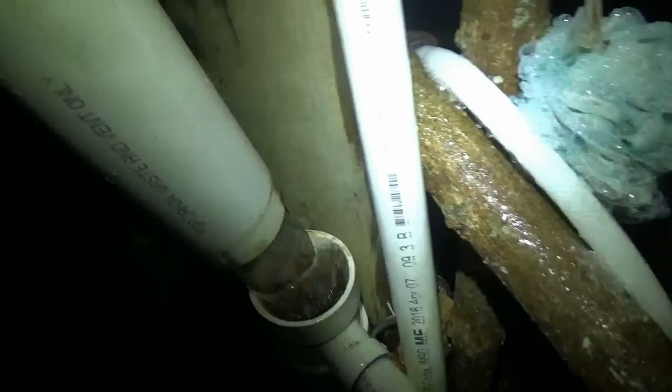Real quickly I'll point out this whole bottom part of the standpipe is glued together. The top I did not glue on for a couple reasons. One, so you can take it off to work on it. And two, if you add a float gauge later like I did with a couple of bottles and a reflector post, now you have a way to know where your water level is at a glance on your standpipe. It also makes it so if something gets stuck in there, you can get at it to get it out. Lots of handy things about that.

I'll just step back quick and let you see the gauge is low at the moment because the pump is open, it's just draining off water. We'll shut it off and you'll watch that gauge climb up in a sec. Okay, here we are.

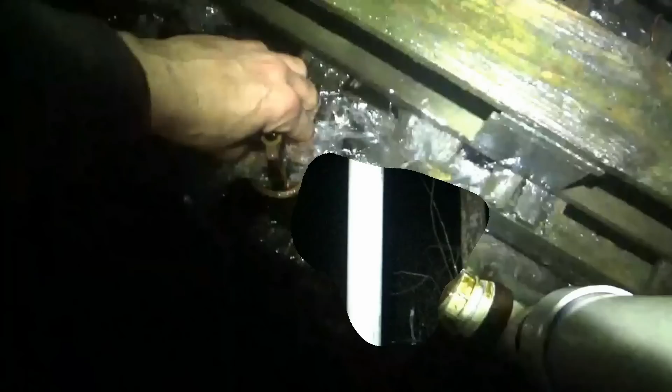And I just want to point out that I used a, that's a little loose. I used a foot valve instead of a swing check valve. I highly recommend the foot valve because it's a guided valve, and you can add weights if you want to change the stroke cycle of the pump. You can tweak your pump efficiency, water volume delivery, and you can scale it back if you need to for low water supply to some degree.

Other thing that I do, I take two PVC fittings, 2-inch on the 1.5-inch brass pump that I have, and I slap them over, and that way we don't end up with...

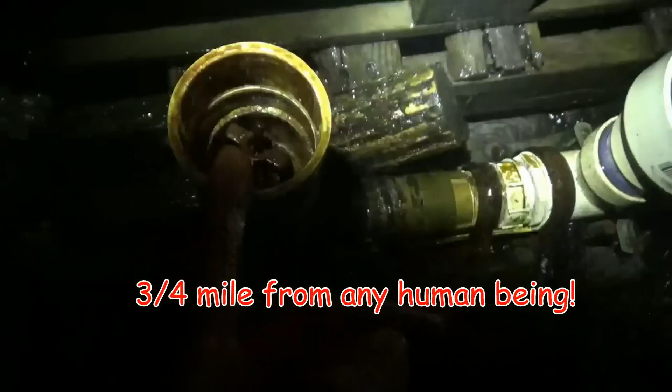Wow, somebody's wearing some perfume. Wow.

Anyway, that way we don't end up with the water spitting off both sides on us. So I shut that off, and you could hear the bubbles gurgling up, I'm sure. And now you can see, if I zoom in on the standpipe, that reflector is sitting up out of there now, indicating the reservoir is filling up.

So we'll see if this will start up. It's been open for a while, so it hasn't had a chance to accumulate a lot of water in the spring, but we've had good water this year, so hopefully it'll go. So let's see. I'm going to close both the valves for startup, and that pressure you're hearing is pressure sitting on the valve from when the pump was running before, probably. So let's just, alright, we've dumped off all the pressure.

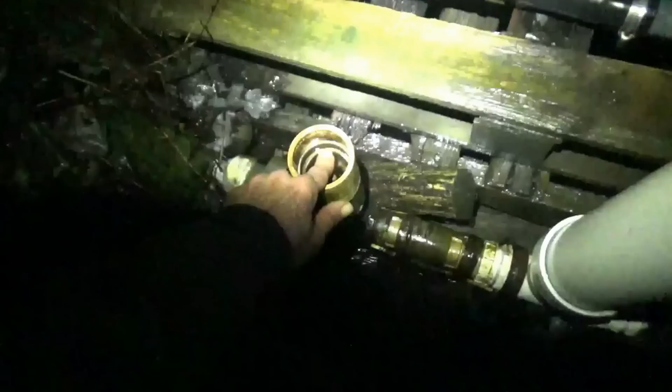And see, this pump starts right up pretty easy. But it's well tuned. So there you go. We'll open the output valve. You can see all that pressure coming off from that. That's because the delivery line is frozen right now. It's one of the points it crosses under the soil. But that's it. That's all there is to it.

I would use brass valves for your swing check valve, and or stainless, even better if you can afford it. I would put a union here, right on your input to your pump as well, and I would put a shut-off valve right in front of that probably. I haven't done that yet, but as you saw, I can bypass. Let's see. The rest of this should be steel. These other fittings in between should be steel.

And I would do PVC, you know, different union sizes to make your fit up to get to your pipe size. I don't have 4-inch here. I have 3-inch actually. And it's maybe 36, 42 inches tall, somewhere in there for the 1.5-inch pump. And that's plenty of space. Probably could do half that and be okay.

Okay, I think that's the majority of it. I did mention having the extra T valve. That's this right here, so you can dump off if you need to dump off. And I also have a shut off on the output, so I can shut off the output and do testing or divert water. One last important detail, mounting.

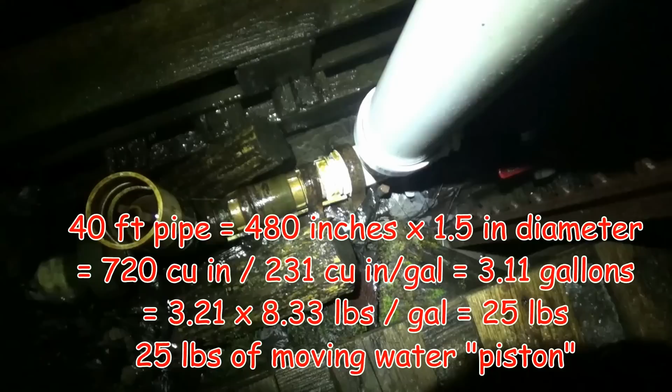And even given that, I could probably improve my efficiency a little more if I set some concrete in here and really shored this up solid. You want to anchor your pump really well. There's a lot of force there. Think about it, a 40-foot long pipe, 1.5 inches in diameter, moving water, slamming on one spot. Okay, that's it.

Okay, I think I'm finally done with this video. We've covered a lot of stuff here. Thank you for bearing with me if you've made it all the way to the end of this video. It's going to end up somewhere around 1.5 hours all said and done by the look of it.